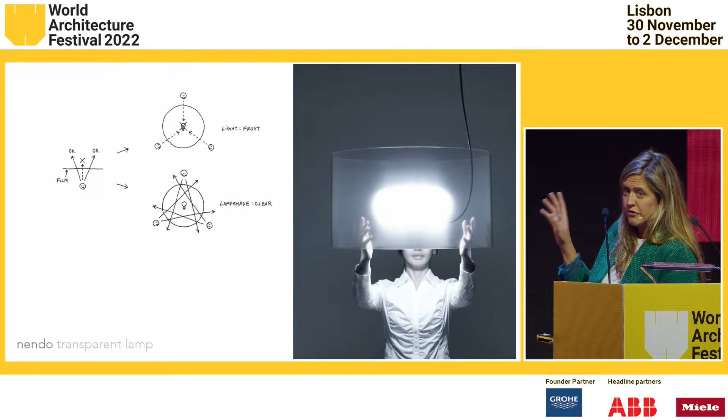So if we talk about acoustics, and this is really the part that this journey of these concert halls has taken me through, the 2 that I'm showing you, I've chosen simply because they're completely opposite problems. But what is interesting, when you look at the way architecture and music have evolved, there is quite a linearity between them. And it shows very early on in this relationship between the Gregorian chants, for example, and cathedral naves, and how the architecture and the music have evolved.

Obviously, Gregorian chants need a lot of reverberation, and therefore churches are so good for it. But if you also look at the architecture and the music, Baroque music, at the time when the aristocracy were commissioning the music to be played in their living rooms or chamber orchestras, you can see the architecture being very sort of flourished and a little bit like the music, very rich.

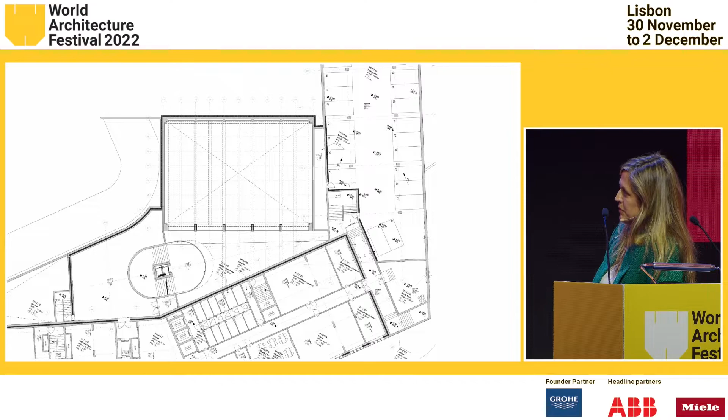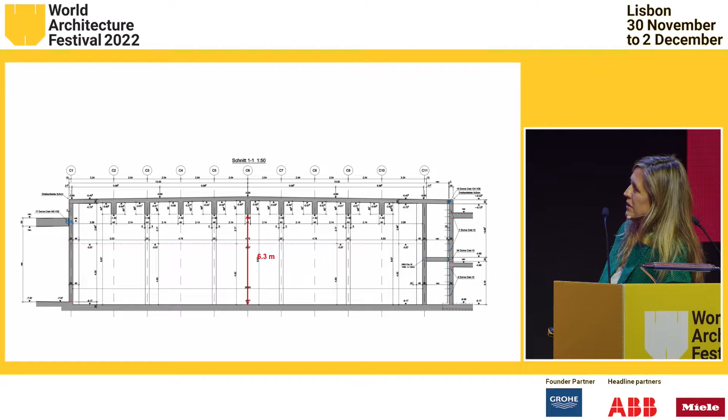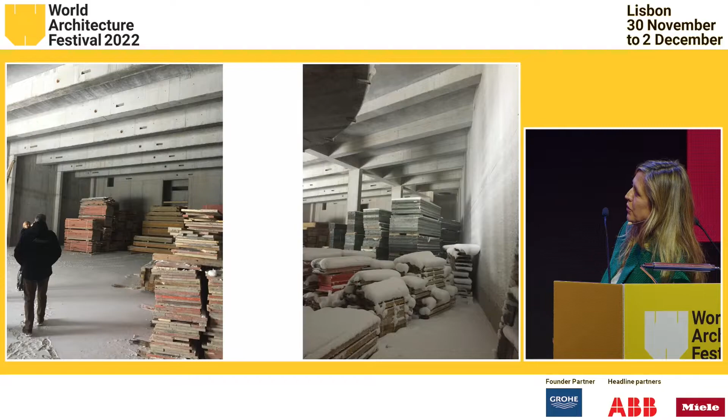I got the project. And then he said, "Well, here we have this underground bunker, this space, and we want to turn it into a concert hall. Can you do some acoustic stuff on the walls and decorate it a bit and turn it into a concert hall?" And going there, I realized actually the volume is all wrong, the shape is all wrong, there's no natural light. It's absolutely terrible. This is the state it was in when we found it, and you could see that it was designed as a ballroom and really didn't work.

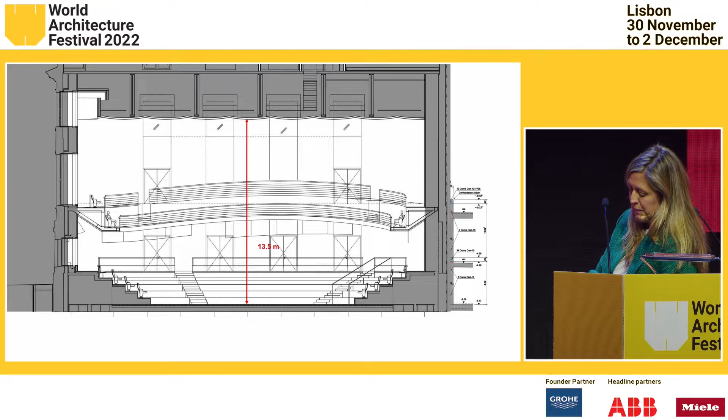So I said to the client, look, it doesn't work. We need a bigger volume for the acoustics. We need more space. He had ambitions of putting in a 75-piece orchestra. I said you could put a 4 or 5-piece orchestra, chamber music in there. And then I flew him to Berlin to see the opening of the Barenboim Divan Hall, which had exactly the same plan, but the volume, it had 13.5 meters compared to the 6.3 meters that we had. And we sat around the different spaces, and I explained to him how acoustics and volume and visual all work together and how important that was. And so he then understood.

But we had this other challenge that we had to design and build it in 18 months, because they had a big opening then. And we couldn't get new planning, because planning in Switzerland takes years. And we couldn't do new foundations because that would be too expensive. So we had all these limitations.

So we found a way that if we stand behind this line, this green line, which is a Swiss planning thing, and we cut the roof open and we lift the roof up, and then if we hang a backpack to it, we could essentially increase the volume significantly. And then what I also thought intuitively is that if you see bigger, you will hear bigger.

And there was something so special about creating a concert hall in the Alps in Switzerland. There were no concert halls. I mean, there are small chamber music things, but they weren't proper concert halls that were able to accept an orchestra like the Berlin Philharmonic, which they wanted to do. So I thought, well, we really need to bring the mountains into this concert hall. It has to be absolutely special.

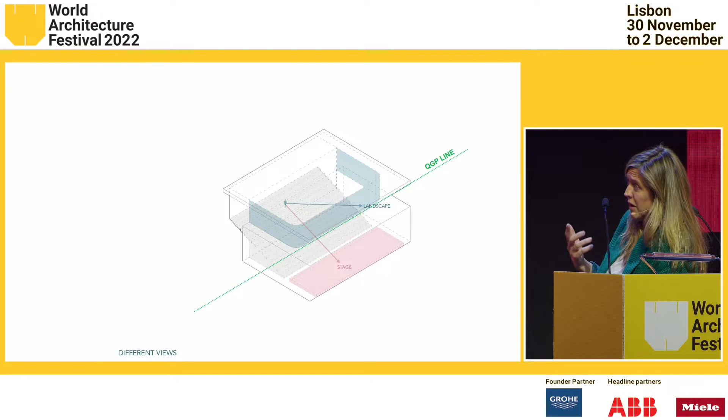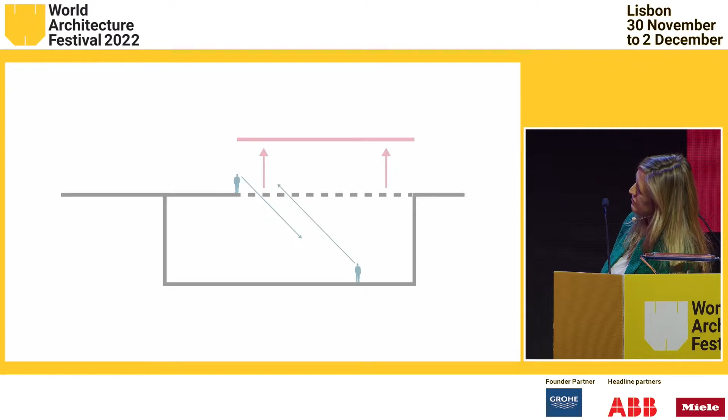But more importantly for us was this thing that if you saw this much larger space, the music would feel much larger and much bigger. And that was all theoretical. And we went along with it. And this was an early sketch, very, very early on. And then we thought, well, it's there, but it's not quite there yet.

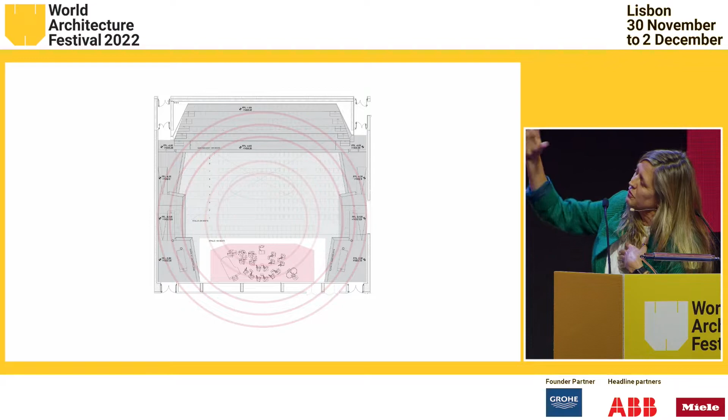And then we started working, we had 8 acousticians on this job, and we started working with an acoustician, and we started looking at electroacoustics. And what it does is that essentially it's a system that, sorry, before that I have to tell you, we put the stage in the center, we wrapped the people around it, so this intimacy occurred. But then if you have a 75-piece orchestra in a volume of that size, you're going to be sort of overwhelmed by the music.

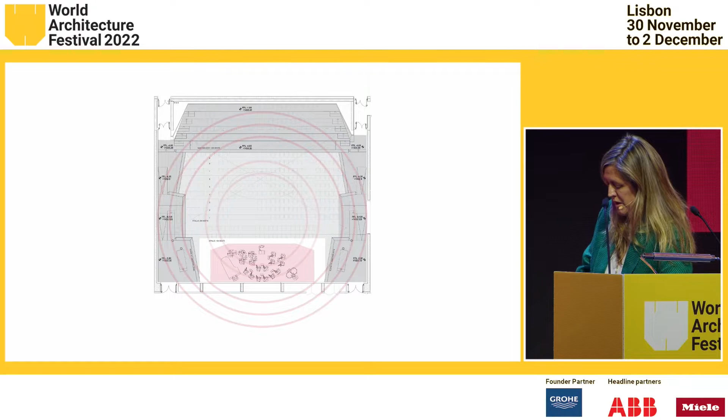And so we started looking at this electroacoustics, and that was very interesting, because it doesn't amplify music, it doesn't change the music. All it does is we have something like 75 speakers all around. We have 125 microphones everywhere, and it takes the music, so the natural acoustics works, and throws it back sort of microseconds later and dupes your brain into thinking that the space is bigger. So we said, this is great theoretically.

We went to see a space and we tried the system. And what was extraordinary is actually when you change the system, the space started looking bigger, physically looking bigger. And obviously, it hadn't changed. And then once you went too much, once you put it on cathedral setting, your brain went, no, now you're fooling me, and it all fell apart. So there was this very slight moment when you can actually fool your brain into understanding the space.

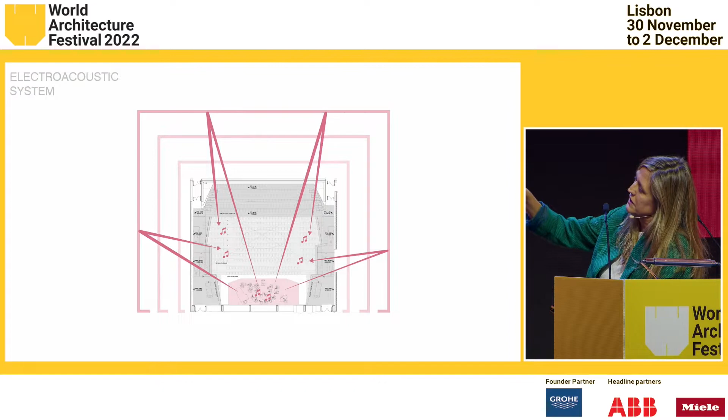And what it made us realize is actually you perceive space through your eyes and through your ears. If you're in a closet, you know you're in a closet. If you're in a cathedral, you know you're in a cathedral. You don't need to open your eyes. So that's quite obvious. But what this did is it took our hall and acoustically amplified it to a much bigger hall, which meant that they could actually accept much larger orchestras.

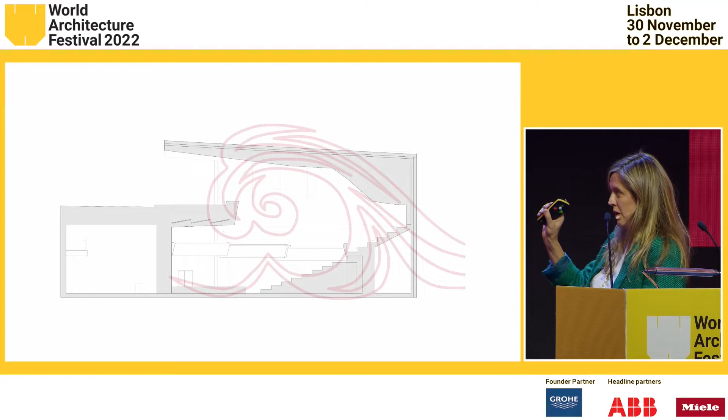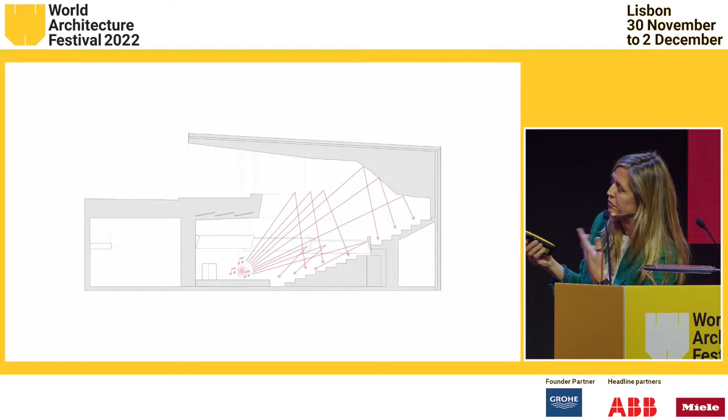And what we've done is we've left it to the conductors to decide what reverberation times they want and how they want to use it. And the natural acoustics work perfectly. But if they want to heighten or change it, they can do that. And what's interesting is actually when we design for acoustics, we design for the orchestra. The audience understands, but the ones who really understand are the musicians. And so they always calibrate their concert hall before any concert to suit them perfectly for the type of music they will be playing and for the size of the orchestra.

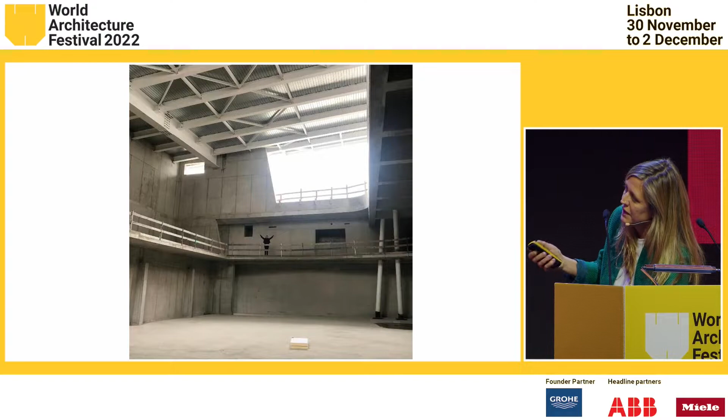What was difficult is we had to actually design the glass for this because of the acoustic requirements. We couldn't find a single glass, I mean, this is triple glazed, but a single glass pane that could deal with the 50 dB requirements that we had. And then we worked with the glazing manufacturers to get the right dB rating for certain decibels, and were able to get this very, very transparent glazing bespoke for this particular project.

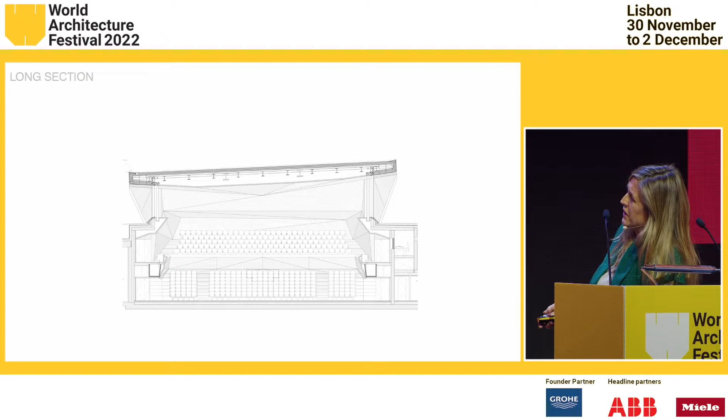The whole shaping of the concert hall, all of this origami is very much done for the acoustics. So everything is angled according to the acoustic requirements, and to get the right level of spreading of the sounds throughout the hall. And you can see how we've integrated all the microphones and speakers to sort of not be visible. And this notion that you are sitting in a hall and looking at the mountains being so important.

And all of these panels, some of them are acoustically transparent, some of them are reflective. All of this is designed in a very technical manner, but the result is something that is very simple and uncomplicated. So that was the problem of having a small volume and trying to increase it, and finding ways, both architectural as well as technological, to grow it.

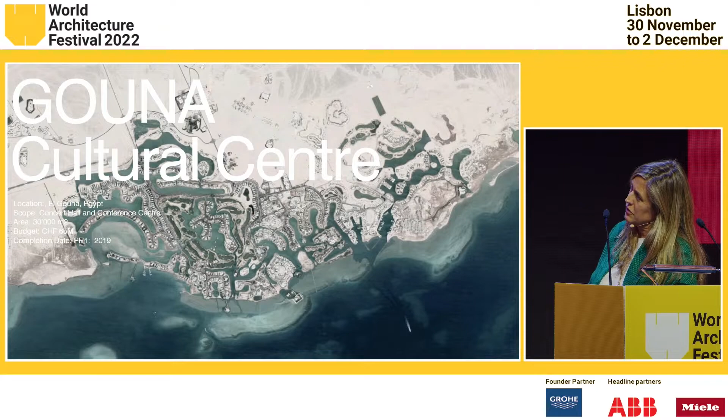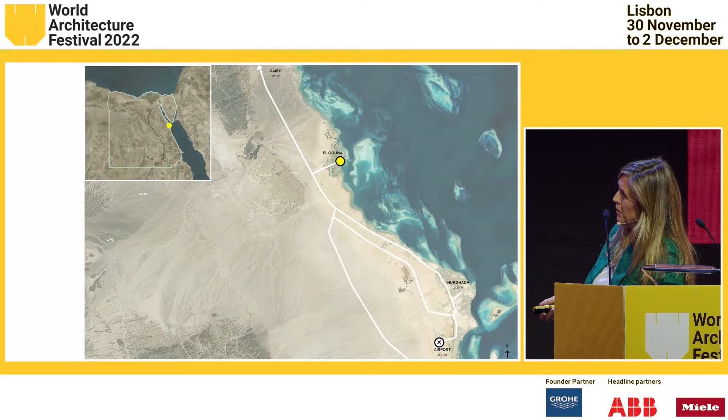El Gouna was actually completely the opposite. El Gouna was the same client. This client develops cities rather than buildings, so he has an enormous need for architects, and kindly enough, he gave us another concert hall to do in El Gouna. And Gouna is 300 kilometers south of Cairo on the Red Sea, a beautiful waterfront resort. We were asked to essentially come up with a brief for a cultural center.

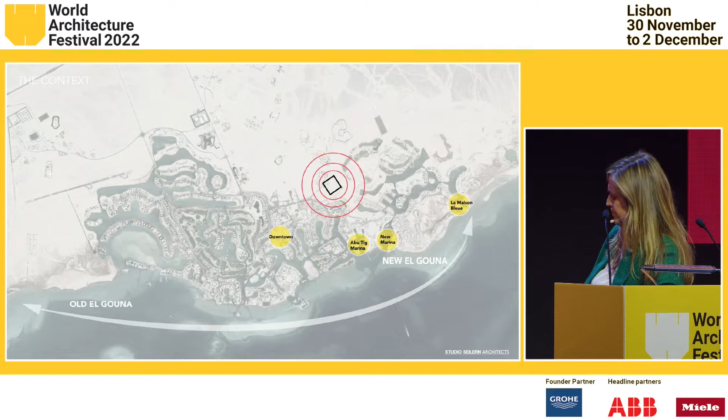They have hospitals, they have stadia, they have schools, they have hotels, I mean, you name it, it's a town, but they didn't have any culture, and they were doing all of their cultural elements built up as festivals in between the spaces, and it was very complex to do every time. So they basically allowed us to find the site, and we decided the site shouldn't be a waterfront site, because that would be greedy. That's where they make the money as developers, a waterfront site.

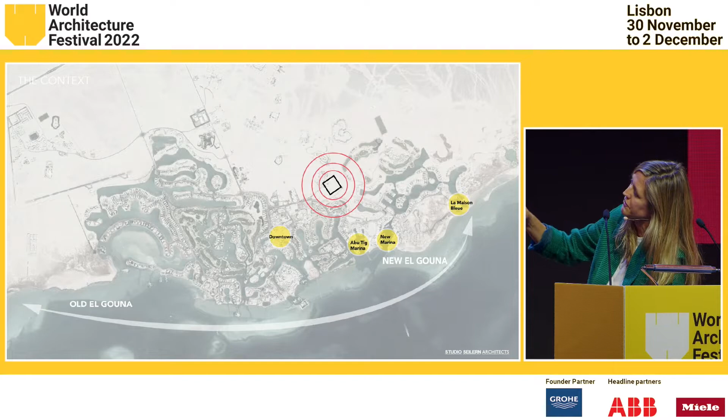So we didn't want to do a waterfront site, but we wanted to do something that would connect all the different old Gouna and new Gouna and all of these different areas, so that people, when they're driving around or walking around or bicycling around, will come by this cultural element.

And we were very keen that we are now in Egypt, we're no longer in Switzerland, and we didn't want to come with our Western mentality of this is what a concert hall should look like, and we really wanted to do something that felt uniquely Egyptian and yet was not mimicking Egyptian architecture. This game of mimicry, I find, is not exactly the right thing, but I wanted it to feel that this project could only exist in Egypt and nowhere else.

And this notion of scale, the scale of the sculptures and the scale of the colonnades that they have in Luxor is quite something, and we wanted to play with that, and the simplicity of it all. I mean, if you think of the pyramid, the simplicity of their architecture is something that we played with. And the other thing that was interesting is that the arch is a Moorish invention, a typology that's been used over the centuries, and it's something, again, that we wanted to play with.

And so we put the building essentially on a 30,000 square meter body of water, which is all gravity fed, so no pumps, because we are in Gouna, the city of water. And then essentially we covered the concert hall in yellow, the conference center in blue, and the outdoor film festival area. And then we created these colonnades around the building. And that was simply to do two things: to create sunshade and protect the buildings from the strong winds of Gouna, but also to be able to build this in 3 different phases.

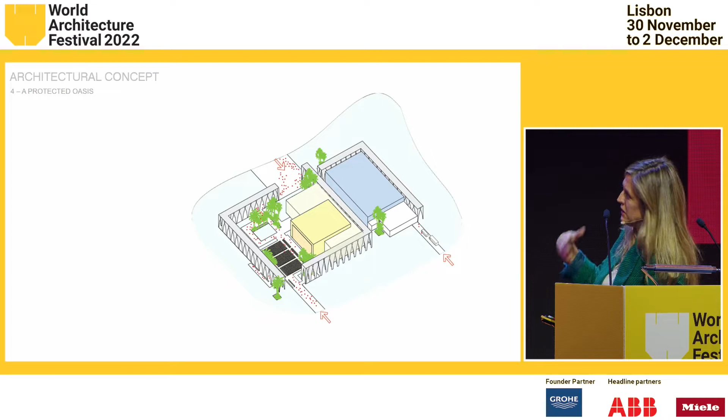Phase 1 being the colonnade, phase 2 being the concert hall, and phase 3 being the conference center. So phase 1 is built, phase 2 we finished CDs, so they're going to build at some point. But this idea that it becomes a public square that can be used all the time for festivals and outside, for weddings, for you name it. So it had to be something that was usable and flexible, and also have the sort of high views

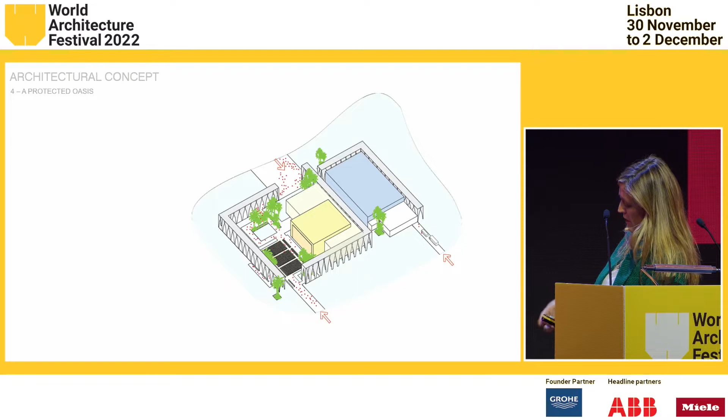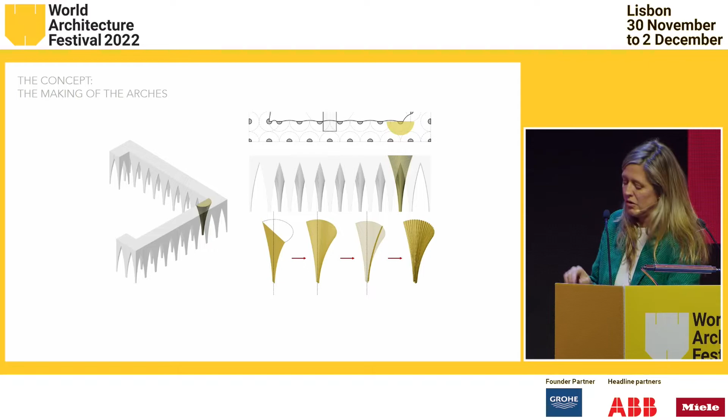of culture and music. This idea of colonnade: we were appointed in January, and we had to complete phase 1 by September, so it was incredibly quick. So we had to design the concert hall, the conference center, and the colonnades all and build it at the same time. But we thought, how can we reinvent the colonnade? And what we did is a very simple move of taking columns and just staggering them and then arranging them to just find a new typology for these arches.

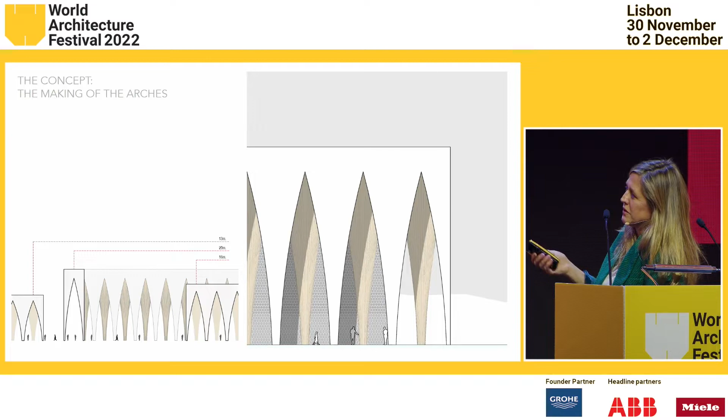And then we played with the scale of Egypt, and we amplified them to 20 meters and 18 meters, etc., giving this sense of this uniquely Egyptian scale. But we were also very keen that it shouldn't be too monumental. It should have a softness. It should feel that it comes from the sand, from the area. And so we created this interior, and you can see in the middle view, once you stagger the arches, it creates a very complex geometry. And so we had to come up with a geometry that would be able to be built and yet absolutely flawless at the top. And you can see how we developed it.

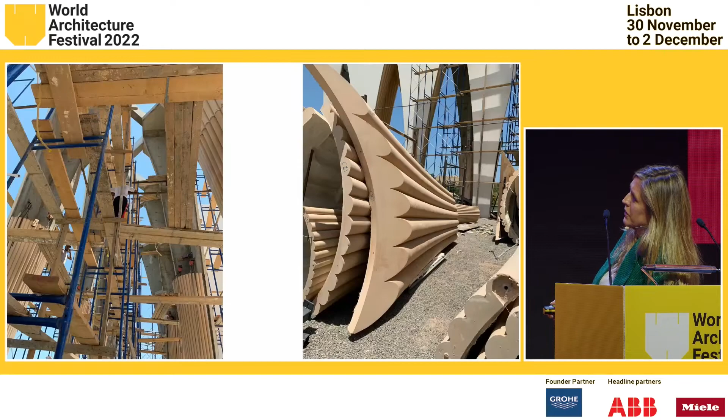This is on site. So these are all GRC, glass reinforced concrete panels that we installed. And you can see here the scale. That's me next to one of these panels. And they did an absolutely beautiful job of building them with absolutely flawless connection in between. And I was so impressed with the quality of craftsmanship in the middle of nowhere in Egypt. But this softness of sand and feeling that you are in, it's like a cave in the middle of the desert. And you can see here some of the views.

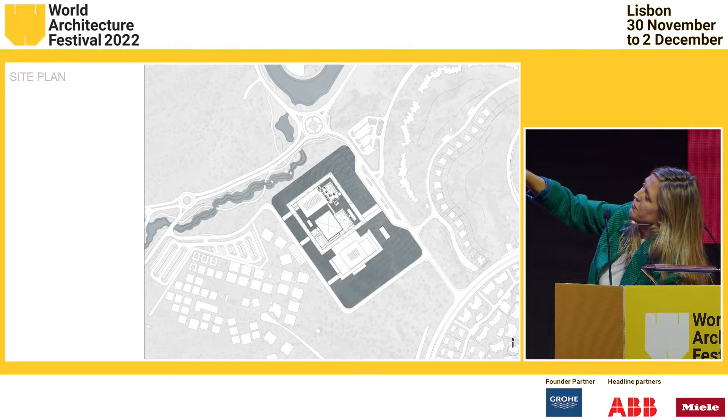This is the plan, so the 30,000 square meter reflecting pool around it. One of the reasons we chose this site was that it was next to the Nubian village, which is where a lot of the workers live, and actually I think it's one of the prettiest villages in all of Gouna. But more importantly, it was next to this body of water, and we wanted to take the water, flow it through our building, through our plazas, and then reject it again without the use of any kind of pumps, allowing it all to be gravity fed.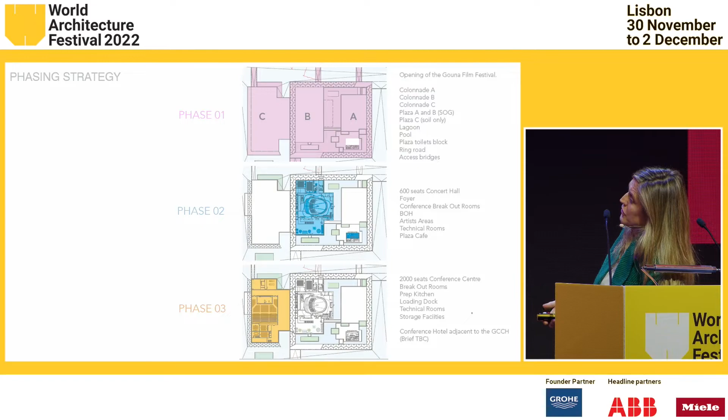These are the 3 phases. So you can see phase 1 completed, the plazas and the colonnades that they've been using for weddings and for other events. Phase 2 now the concert hall, which I'm going to take you into. These are some of the views of what is built now. So we designed the plazas essentially to receive these future buildings, so that they can be built easily once they're ready to build it. And these are the early renderings. This is the concert hall building.

We were using a local Egyptian stone. They love concrete. The client owns Lafarge in Egypt, so they absolutely love concrete, and we were trying desperately not to use concrete. And so we found an Egyptian stone that if we CNC'd it was actually more cost effective than concrete, and that was a great way to be slightly more environmental. I'll take you through it. And now the concert hall.

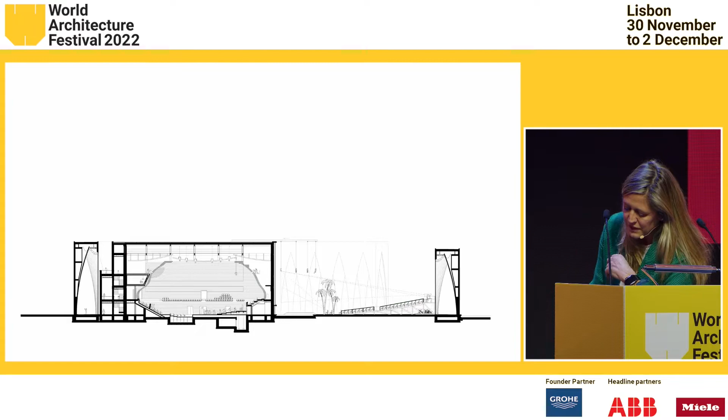The concert hall was actually the completely opposite elements. The client wanted a 125-piece orchestra so that they could play Aida and some big pieces in there, but only an audience of 600. And when you have a 125-piece orchestra, you usually have an audience of 2,000, because otherwise it just doesn't make sense. So most large concert halls have large audiences. And so when you design a concert hall, you start with a stage, you place your musicians on it, and you size the stage, and then you start building the audience around

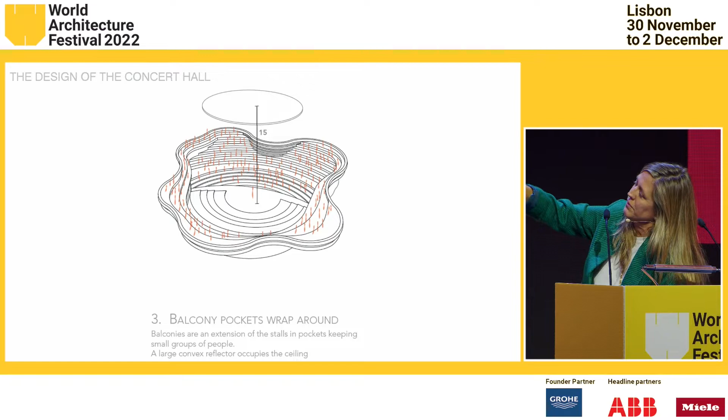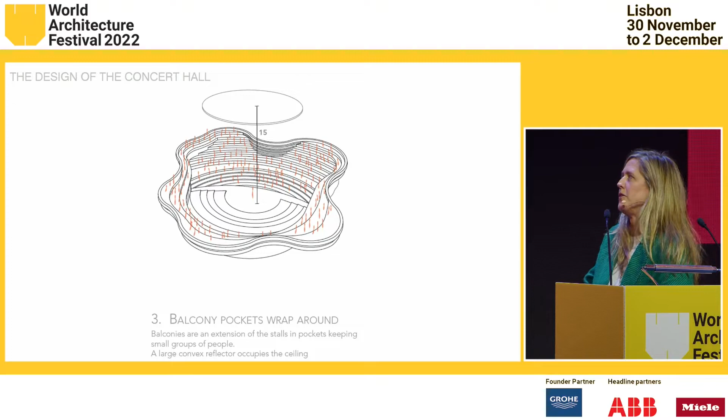it. And again, like Sharoon, and like Andermatt, I wanted to wrap the audience around the orchestra, so you have this very intimate connection. And because 600 is not a big audience, we wanted everybody to see each other and sort of feel part of the same element. And then we put the acoustic reflector above the orchestra, as you need to.

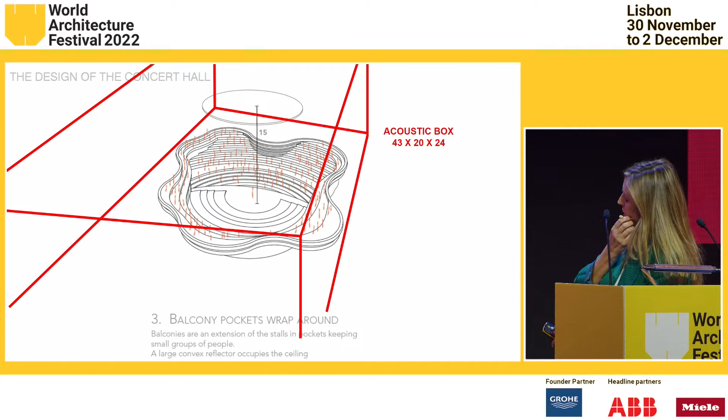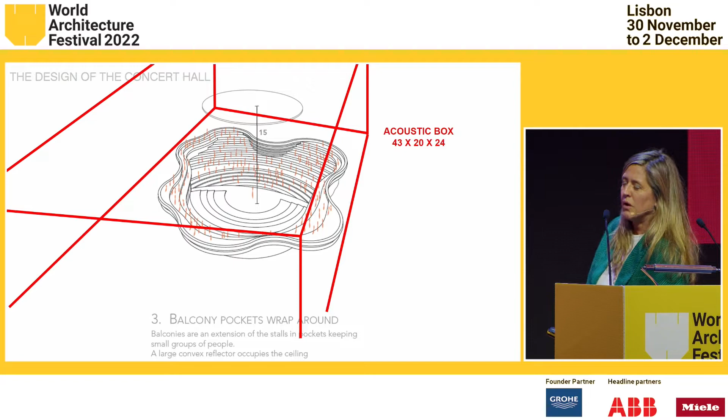And then the problem was that the acoustic box, the shoe box that worked so well for acoustics, 43 by 20 by 24, would have totally overwhelmed the audience. And it would have been like sitting in an IKEA box while this orchestra was going on. So it just didn't feel right.

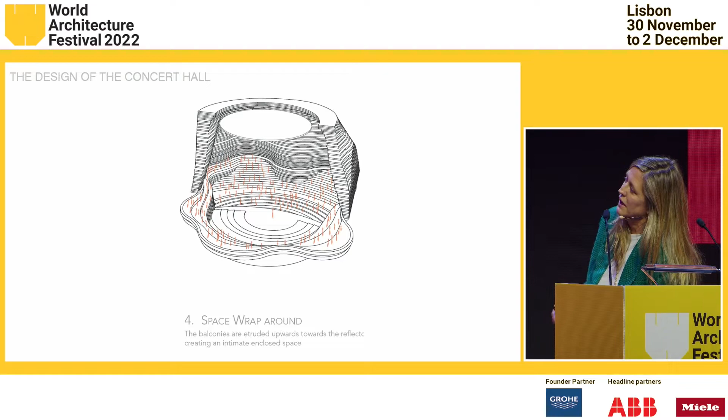And so our solution was to create what we call the intimacy dome. And the intimacy dome is completely acoustically transparent, but visually solid. And it allows light and sound to go through. But more importantly, it compresses the space into a much more intimate space that allows this relationship between the orchestra and the audience to occur without the feeling that you're in this big dark box.

And then we placed the acoustic box around it, and this is where you put all the speakers and the reflectors and the curtains and all of the things that you want to do for variable acoustics that usually look quite ugly in a concert hall. And everything is hidden, the lights, the microphones, the speakers, all of that can be put into more technical space, and people arrive in the technical space, see the technical space, and then walk into this very organic space.

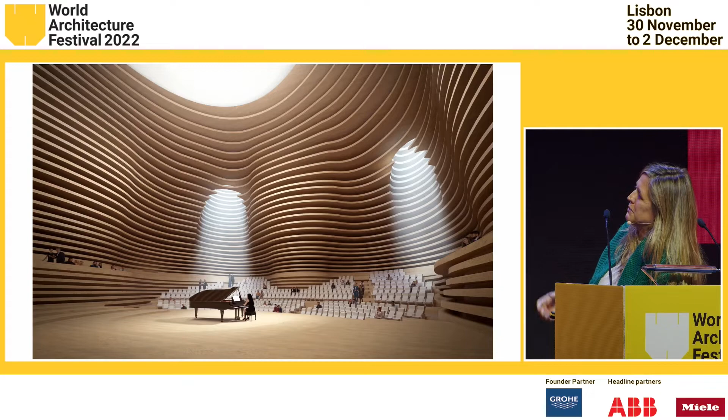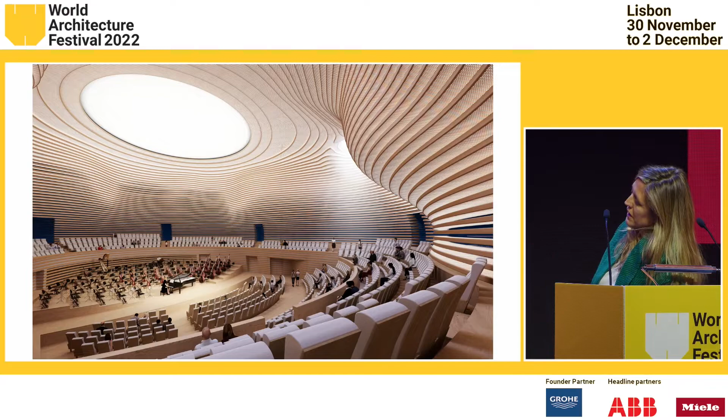But then we moved on and started looking at how we could resolve the same idea with a mesh, a transparent mesh, and hanging all of this and allowing these shafts of light to come into the space, and this sort of very intimate relationship between musicians and audience.

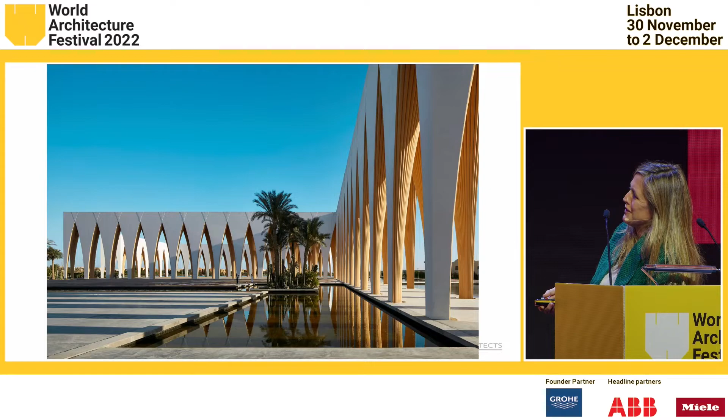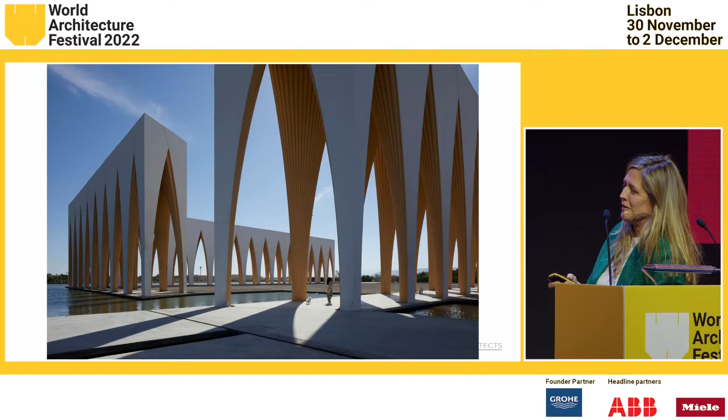And here I'm flipping through some of the festival plaza. The construction occurred before the pandemic and during the pandemic, and it was quite interesting because Alberto, who's here, and we were all sitting on WhatsApp and sort of telling the landscape architect to move the palm tree to the left, and then we came after the pandemic to see it pretty much built.

This is the Nubian village and the relationship with the building. They have one of the best views of the building. And this idea of the reflection and how it really makes it a sort of a space for Gouna, this is the tallest building in Gouna. There's a height limit of 12 meters in Gouna, and this is sort of the cultural space, the one that was allowed to go higher, but also really plays with this idea that Gouna is a city of water, and these reflections really add to the lighting and to the effect of the space.

And this is how they use it. So this was the film festival. They have the annual World Championship of squash there every year. They have ginormous weddings and all sorts of events that happen there. So they are actively using it all year round, currently as Festival Plaza. And then as the concert hall gets built, they'll use the other plaza, and eventually the conference center will get built, hopefully. And I'll just show you a movie. I think it's always better to see it moving, so.

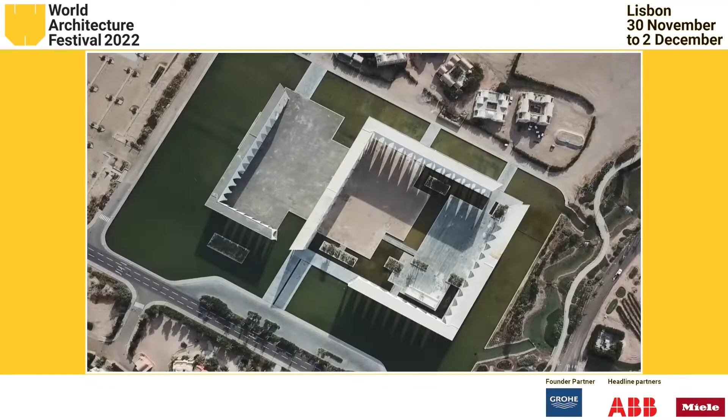We're here at the Gouna Plaza. It's the site for the Gouna Conference and Culture Center. It's built over a 30,000 square meter area. It was built in a period of 16 weeks in October 2019.

So the inspiration behind this project was Samih Sawiris' time spent in Berlin, where he fell in love with orchestra, with classical music, attending many concerts at the Berlin Philharmonic. This gave him the inspiration basically to build a site here in the heart of Gouna to have these similar concerts, cultural events, including the Gouna Film Festival, which is at its 5th edition, as well as the International Squash Tournament. So we partnered with Studio Seilern to come up with this beautiful architecture that we have here at the GCCC in Gouna.

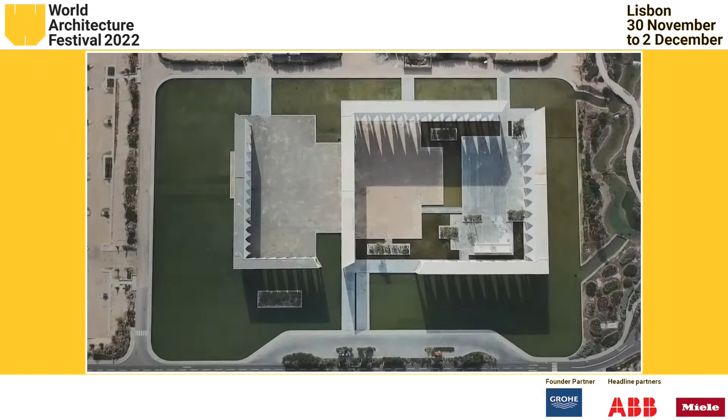The project came about because we had just completed a concert hall in Switzerland, the Andermatt Concert Hall. We designed the plaza and the colonnades really as a way to protect and create a public space, and which would enclose the buildings and unify the buildings into sort of a celebration plaza.

And suddenly the whole thing becomes what it wants to become, which is essentially these colonnades that sit lightly on its toes and are reflected in the waters. We are contextualists, so we were really keen on understanding what kind of impact we would have on this beautiful country, which has an extraordinary architectural legacy.

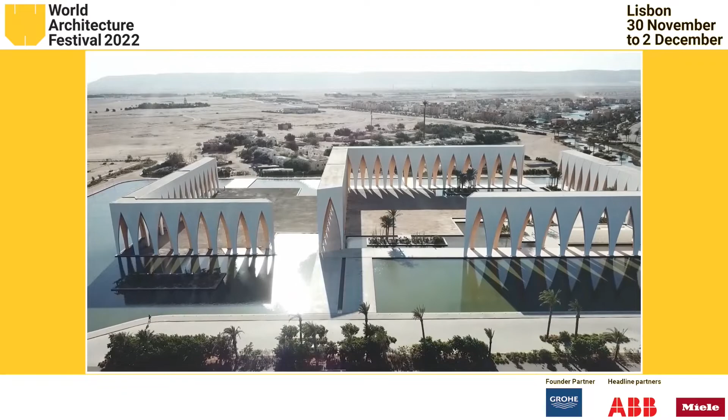I love the skater. It gives scale. There you go. Good now.

I'm going to talk to you now, moving away from acoustics. And this idea, I find it absolutely fascinating how the Middle East is building these new cities in generations. I mean, I'm talking 1 or 2 generations, and the speed at which it's all going. It's daunting, it's frightening, it's exciting, it's everything. And obviously mistakes are made, but also some wonderful architecture is made.

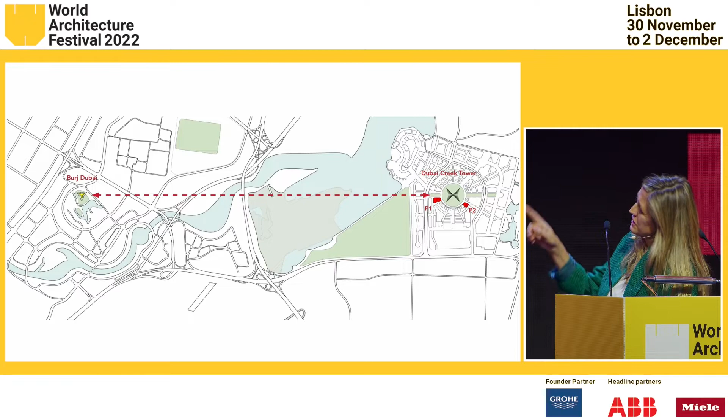And we were invited to this competition in Dubai, actually to do 2 towers, and then it ended up being only 1 tower. It's a competition that we won quite wonderfully, but it's next to Dubai Creek Tower. Dubai Creek Tower is the same developer as the Burj Dubai, and essentially it's a kilometer-tall Eiffel Tower with a viewing platform on top, done by Calatrava. And that was the epicenter of that site.

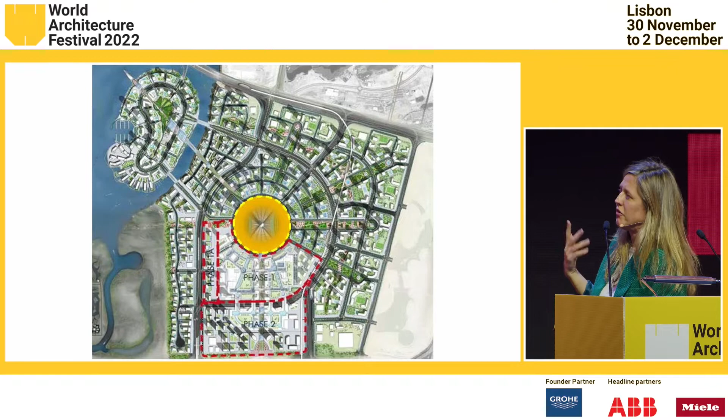And you can see the master plan, how it really organizes itself around this giant Eiffel Tower. Our sites were on either end of phase 1. We were given 2 sites to choose from adjacent to this tower. But what's interesting is that they were building 300-meter towers around the Calatrava Tower. So imagine the Shard, but about 15 of them around this one tower. So the ambition of it was just so extraordinary and so daunting.

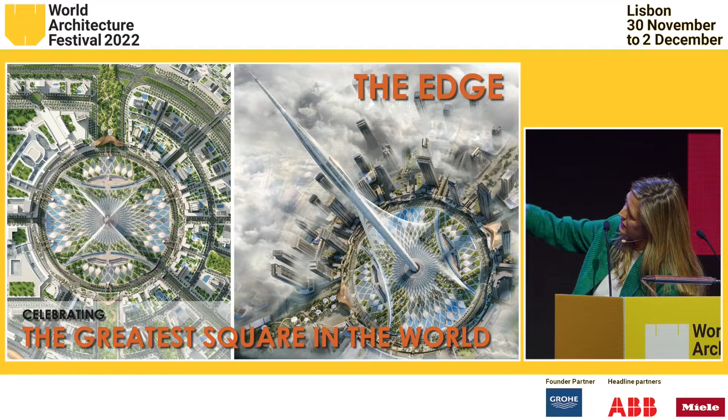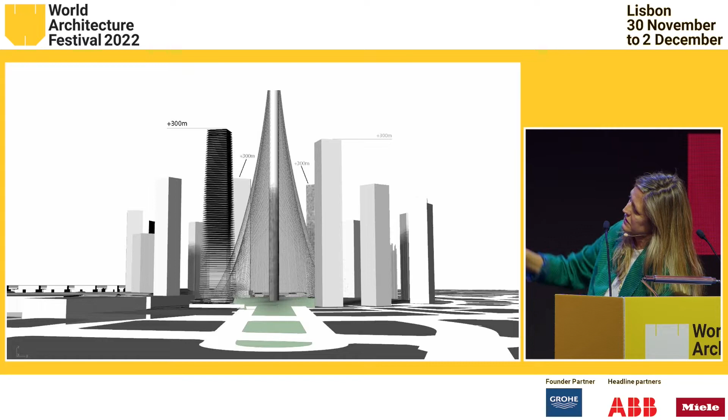And these were the images that we were given. Again, slightly daunting, and you can see all the architecture around it. And we wanted to think about it in a different way. This is the 300-meter tower complex around this Calatrava Tower, which is 1 kilometer tall, and proportionally everything is absolutely scaled up. But the brief was 200,000 square meters, 30% hotel, 70% residential, a 300-meter tower.

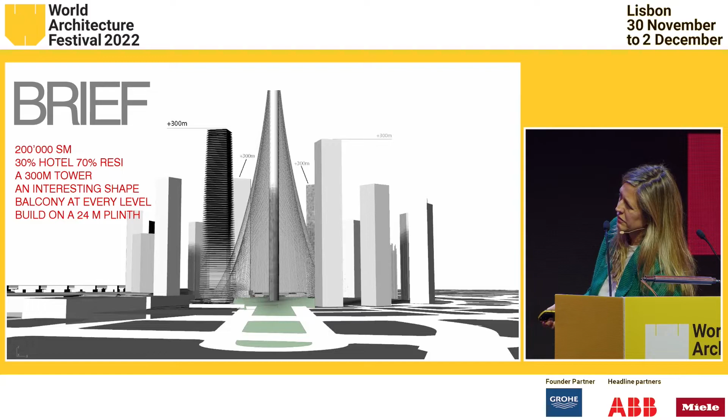And the thing that bothered me was the interesting shape, because I didn't like that concept of an interesting shape. Balcony at every level. I think it's very difficult to do a good-looking building with balconies at every level. And then you had to build it on a 24-meter plinth, because that was what the master plan was asking for. So very little street connection. All things that we found quite challenging.

Next to our site was this half a kilometer long retail frontage. We were basically on a 24-meter plinth, and you can see how all these buildings are built on top of this retail plinth, and then you have residential entrances for all the buildings. And again, we found that challenging, that your front door is between 2 shops, and we wanted to rethink that portion as well.

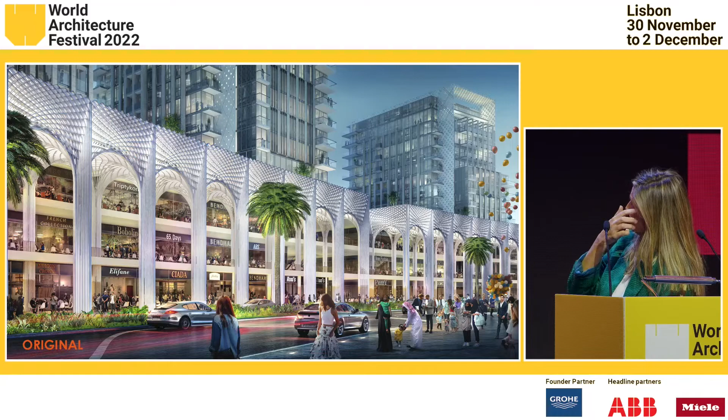And one of the most successful urban gestures, I think, are the Spanish Steps in Rome. They're always filled with tourists, but there's something so spectacular about this very simple gesture, creating this very natural, unthought-of auditorium in the middle of a square. And so our idea for the 24-meter plinth was to say that there's no point putting more retail in there. We can put conferences in that area.

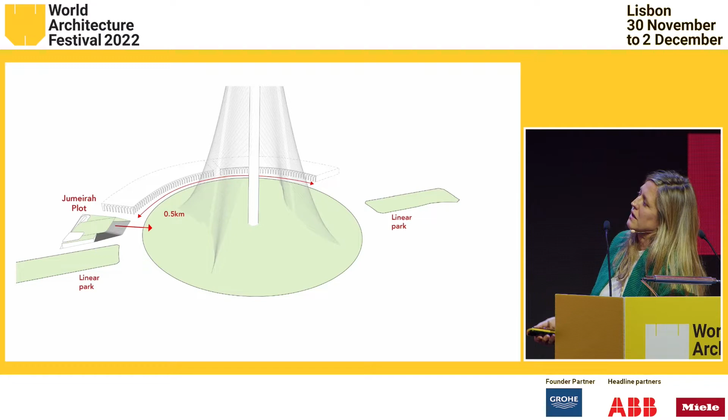And really let's create an auditorium to look at the spectacle of this Calatrava Tower in all its glory and allow people to sit outside in a cascading garden that goes down towards the Calatrava garden below, and this idea of sitting on this 20 plus 24 meter plinth.

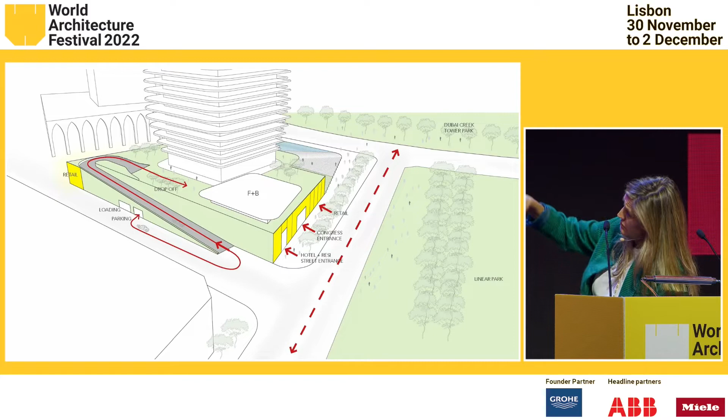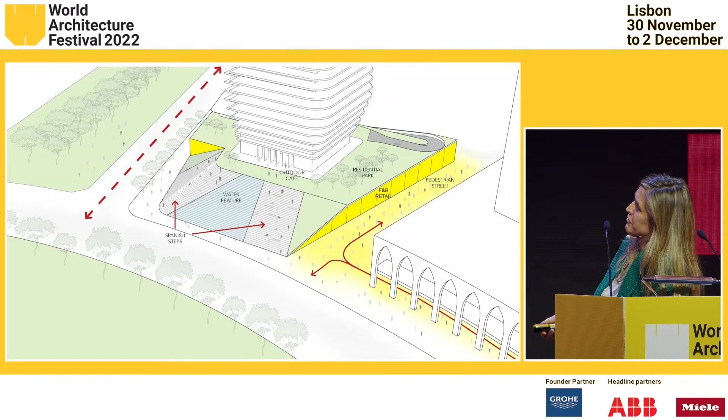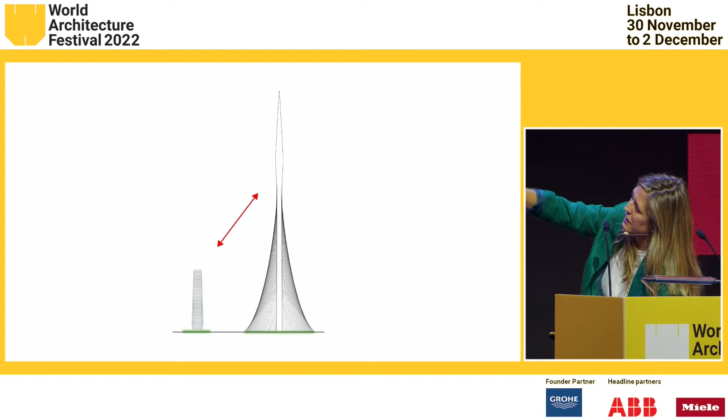And then so this is on one side, and then we put all the services at the back, and Congress and retail, etc. And then we create this tower up above, and you can see here the Spanish Steps with a water feature for a little bit of evaporative cooling, but essentially this feature that created an auditorium onto the Calatrava Tower. And you can see here the scale. So this is 300 meters. It's like the Shard in London and the Calatrava Tower, which is 1 kilometer tall.

And the other thing that bothered me in Dubai, sitting in meetings, is that you would all see these guys outside dangling in their baskets because of the wind and the sand in the wind. The cleaning of these glass towers has to happen all the time. And so it's kind of slightly ridiculous to build glass towers in the middle of the deserts with its sandy winds. And we thought, what if we could create a 300-meter tower that could be cleaned by one person safely sitting on ground, not dangling and not needing a special certificate. And that was the parameter for our building.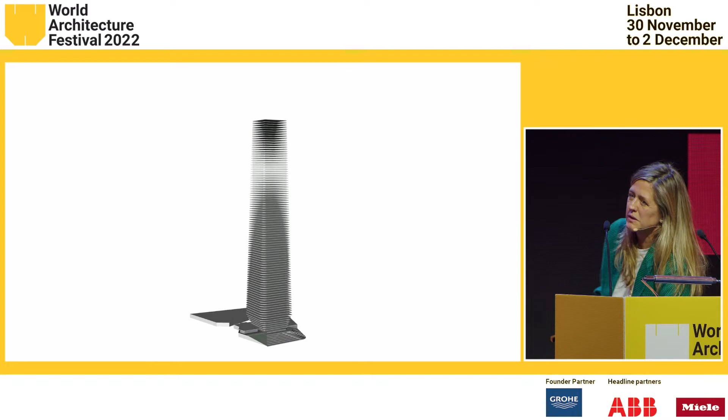So we built the most efficient building, which is a square tower, which gives you the 70 to 75% efficiency that they wanted. And then we wrapped the whole thing essentially with balconies all the way around. And what it did is that when you're going up the Calatrava Tower, it created, and this was a total accident, we had no idea, but it created this wonderful moiré effect of, depending on what height you are, the building becomes completely transparent at different heights. And that was something that we thought was very exciting.

And this is the building. I think the proportions are all off, by the way. Are they off? No? Maybe because oh no, it's better there.

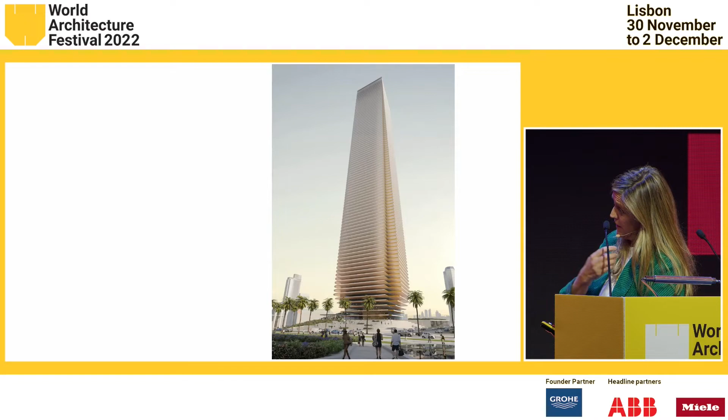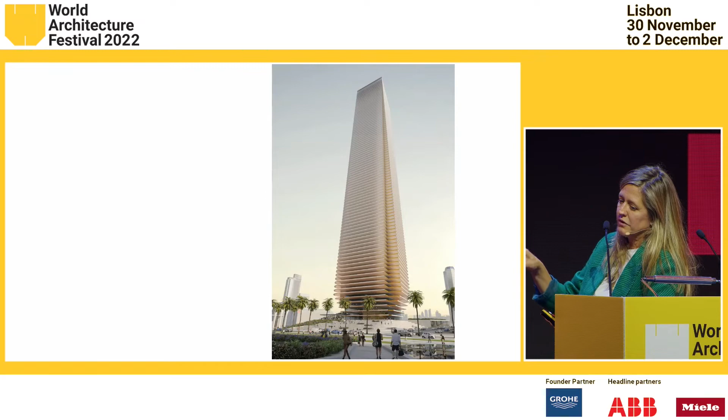But we essentially, by wrapping these balconies around, we then allowed every level, every hotel room, every residential to have an outside garden, outside space that was significant, that we could green. And just by moving the balustrade behind, you never see the edge of the balcony. You don't see people putting their bicycles or putting their stuff in the balcony. And what it did is it allowed this tower to feel like these slabs or these balconies are magically floating, and you can't see the structure, and the whole thing is kind of dematerialized. I can never say that word.

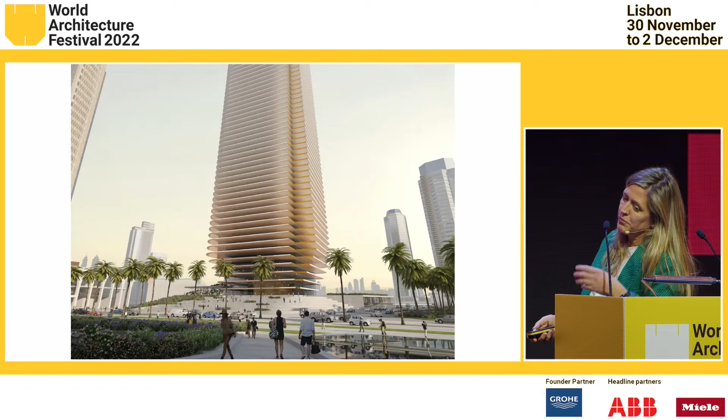And you can see it here closer with the Spanish Steps and moving up from the Calatrava Tower. This is a view from further. And what was interesting is the reason we went and wrapped the balconies, and they're 8 meters deep at the bottom where the hotel is, because a hotel can benefit from outdoor spaces for restaurants and swimming pools, etc. Whereas as you come up, the wind becomes higher and the balcony becomes less usable because of the high winds. But we also discovered that at the 40th floor, your urban engagement with the street is no longer there, and therefore actually it's much more about the longer views.

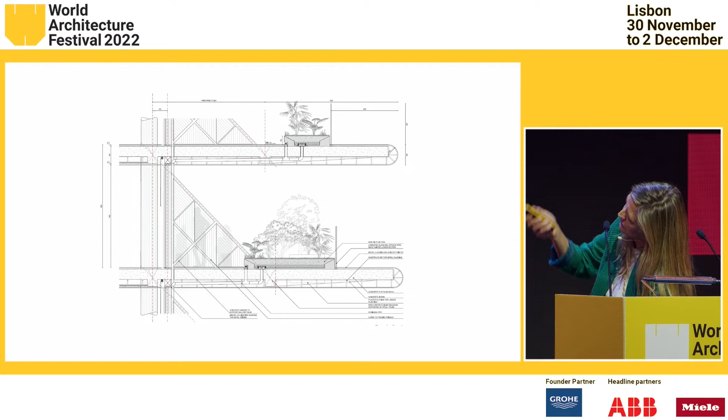And these are the balconies. So these are the balconies at the lower floors, which probably, I don't know, they're 4, 5, 6 meters in this one. And then as you go up, they become smaller. But every level has its balcony and has its privacy. And that was this idea. And we started developing how we could create these balconies and really create these very thin floating balcony slabs by hanging them from the structure and allowing them to give this impression of weightlessness.

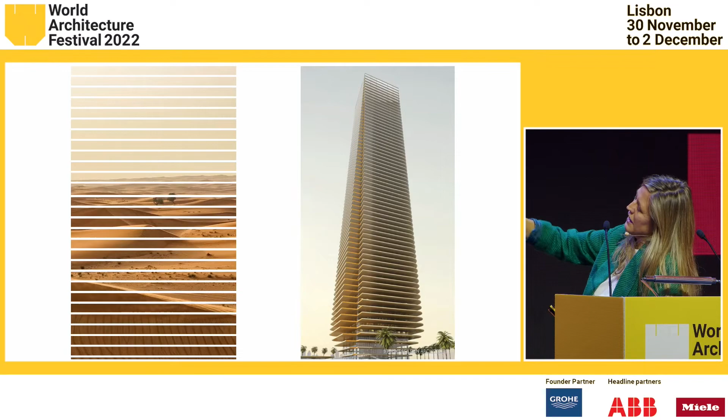And then just by coloring it from the colors of the desert, we discovered that the natural shading of the building as the balconies recessed and the shading became less prominent, it naturally did the same coloring as the desert does, from a gold to a white. And so that was that. Some of the same views. And the notion that you can have a swimming pool that is completely open and yet completely private from the overlooking of the neighbors was something that was interesting. I'm running out, so I won't show you the last one. All right.

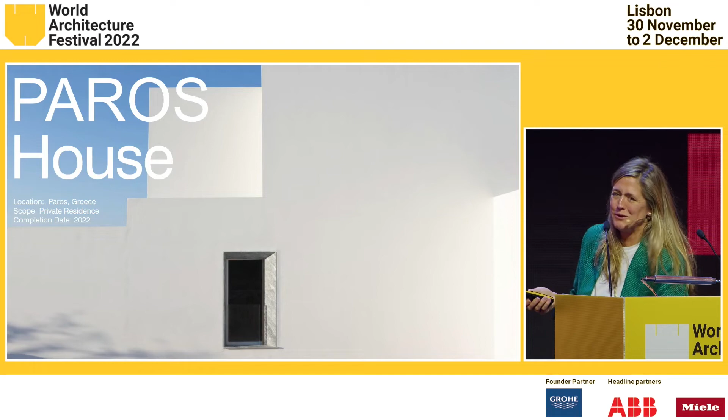Last one, I'll run through it. It's all images anyway. This is a very personal project. This is a house in Paros. It's a personal project for us. We built in an olive grove, beautiful site, beautiful landscape, and essentially we had this olive grove that we wanted to maintain, so we created essentially a building which is a village within an olive grove rather than a building within an olive grove.

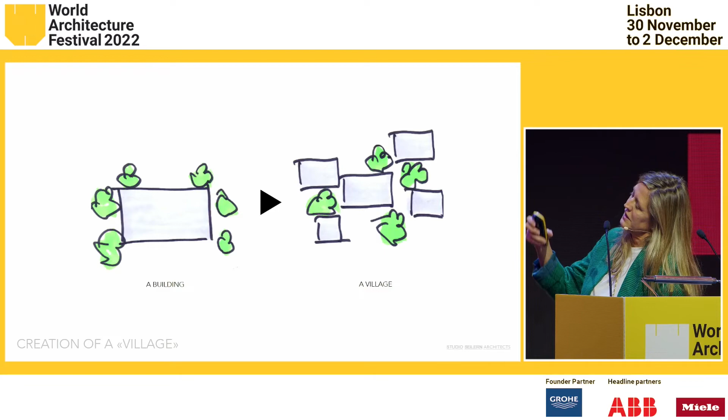But the most important thing was this arrival and this drama of the sunset. You know, when people come in the evening, they come at 7 for the sunset, and we wanted to create this very dramatic entrance, and we created this arrival that sort of culminated in the end with this cantilevering pool that overlooked the sea. And you can see here some of the views. The pool is 45 meters, but it's actually fake because we've put a lot of shallow pieces of water because I didn't want to have such a large pool, but I wanted the effect of the larger pool.

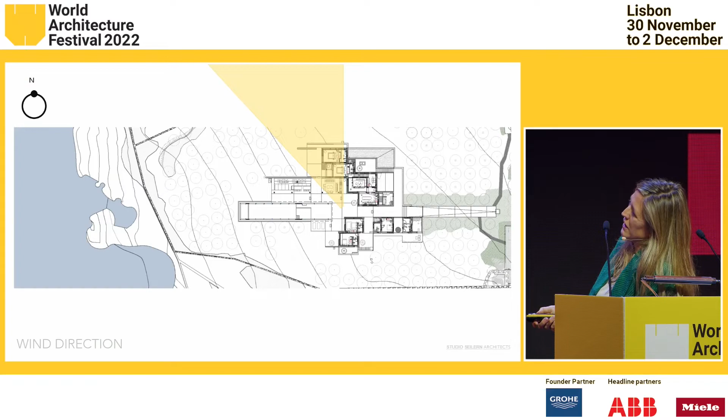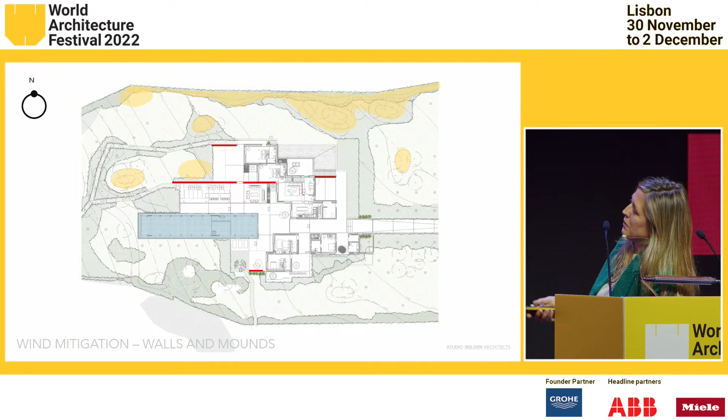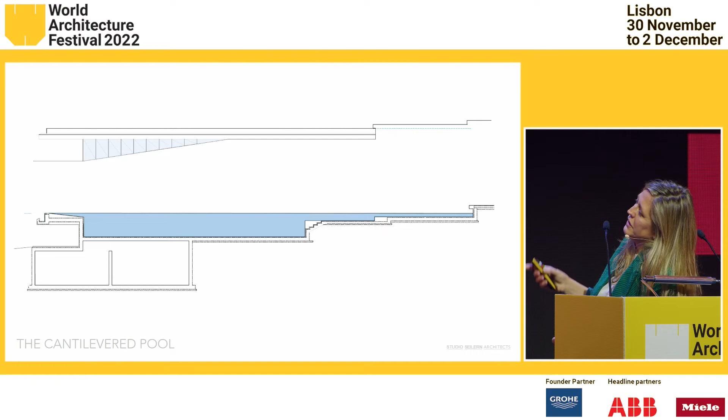And this reflecting pool, we essentially gave the impression of cantilevering the pool by creating this effect of using mirrors and this idea of reflection and how we can warp space. So we created the mirrors underneath and allowed the garden to reclaim the space that we took away from it for the pool, and give this impression that there's a very thin pool just floating above the landscaping and allowing the garden to be reflected in it. And you see this is quite dramatic at night when it's constantly changing personality. When you're swimming in it, you feel as if you're levitating because the trees are lower than you.

And then one last element that we did, it's very simple architecture. In Greece, we wanted to keep it simple. But one of the beautiful moves that they do, they've never had a lot of money, but they did these beautifully carved Naxos marble entrances around the doors and the windows of the churches and the municipal buildings, when there was a little bit more money. And so we borrowed this idea, using this Greek Aliveri marble, sandblasting it and creating these frames around the perimeter of the doors and the windows, with this inspiration from the local vernacular.

Again, this idea of reflection and this idea of light, weightlessness, and all of the platforms seem to be floating and never really touching the water. And so the work with the terrazzo, I call him terrazzo man, Nikos. We spent a lot of time filing the terrazzo together and deciding on the details on site. But this relationship between reflection and the different materials, every piece of terrazzo is slightly different, and this building could be called 50 Shades of Grey, because it is 50 Shades of Grey, but very simple materials, very humble materials.

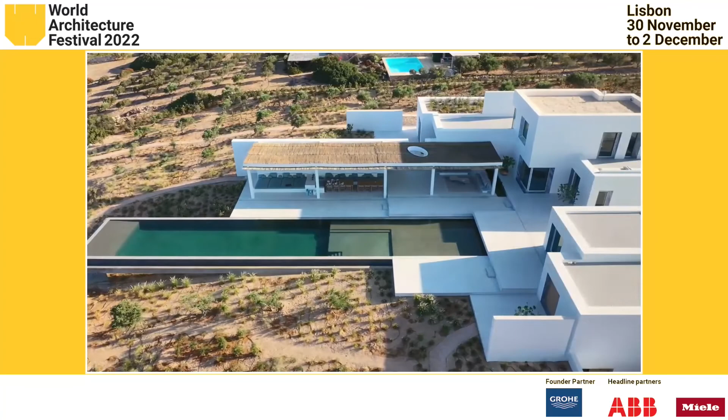Thank you. Sure. You can stop it if you want. All right. Thank you.

Well, just an observation, which is that there are buildings that are designed for performances, and what you've shown us is two buildings that were designed for just that, but then you showed us two buildings that actually perform themselves. So I think it's a wonderful way of reconciling performance and non-performance buildings. They're not that different. Christina Seilern, thank you very much indeed.